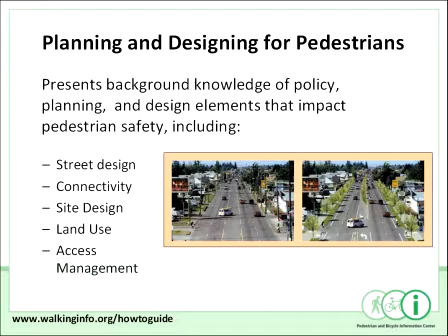Next we get into stakeholder involvement. Before we really start analyzing data, who are the people that need to be involved in helping to make this overall pedestrian safety action plan workable, to make it happen? Because we need more than just planners and engineers.

We need also educators to help educate the public. We need police for the enforcement elements. Public health officials are a critical part of the overall process, and they do a lot of training and education as well.

Engaged, involved citizens and organizations are very important at the community level in particular. Public employees, agency officials, at the state and local level need to be involved and engaged to help with the overall process. Now we're recently seeing more interest by business owners, and that they have some real important elements of this that can benefit them in some ways.

Where you have more pedestrians and bicyclists, but pedestrians in particular, walking by the business at low speeds, or being able to make it a more pedestrian-friendly environment, that's where businesses often are really improved, and we see revitalized towns and cities. And of course, the media is also an important element in getting out the safety messages and other messages that are needed there.

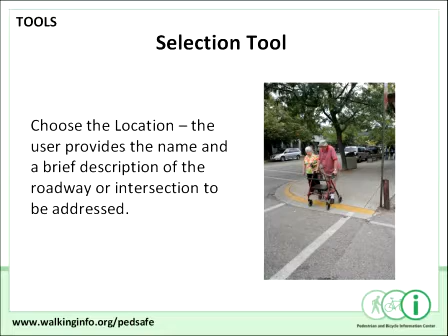This is where it asks you a series of questions. What is the type of the location? Is it urban, suburban, rural? What is the functional class? Is it intersection or mid-block? What's the traffic volume? And what's the type of traffic control that's there?

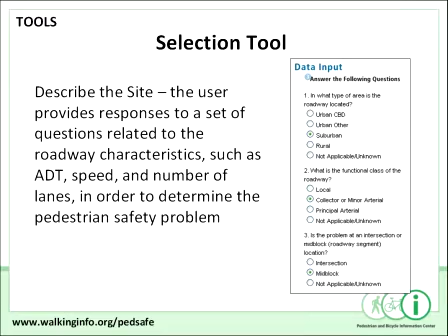It's kind of like when you go to a doctor with an ailment, a pain in your knee or something, and he asks you a series of questions because he's trying to get more information to pin down the cause of the pain. It's the same thing here: this program asks for details about the location so it can help lead to the correct countermeasure.

Okay, now the next step is also really important. It asks you, what is the performance objective? And that's just a big term for what is the problem?

You may want to reduce speeds of motor vehicle traffic, or improve the sight distance, or reduce the volume of motor vehicles going along the street, reduce exposure for pedestrians so that they're not in the street quite as long, or improve pedestrian access or mobility, encouraging walking by improved aesthetics, which can increase the amount of walking. Or what about where motorists or pedestrians are really not complying with local laws?

Are there some treatments that can benefit there? Many of those treatments could involve engineering improvements or address other kinds of behavior that can lead to crashes. So if you have in mind the kinds of behaviors or situations that you want to change, you can fill out one or more of these dots.

If, however, you have more detailed crash information, maybe several pedestrian crashes, and you can determine what type of crashes they are, you can then select one or more of the following crash types. So if it's an intersection, it may be a multiple threat crash or a turning vehicle crash. You can indicate the kinds of pedestrian crashes occurring at that site. That really helps define what the problem is.

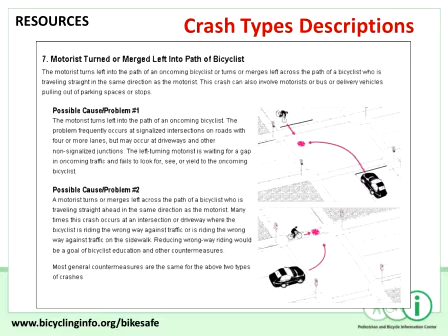So we have shared roadway, on-roadway bike facilities, intersection treatments, maintenance treatments, traffic calming treatments, trails and shared use paths, markings, signs and signals, and education and enforcement measures that all could be considered.

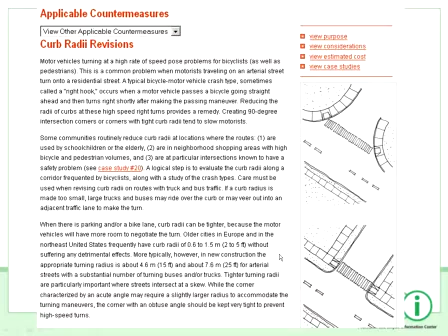Here's another countermeasure, curb radii revisions. It provides a detailed description, images, and then you can link to case studies. This is not a case study about curb radii revisions - we'll get to that next.

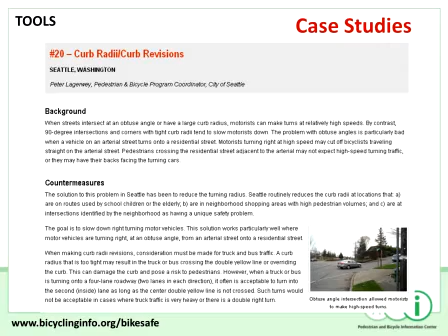But each of the case studies includes background, what the countermeasures were that were implemented, and as much evaluation as was available, recommendations from that community, cost and funding information, and also contact information. So you can learn from your colleagues around the country. Here is a case study about curb radii revisions from Seattle.

So if we want to know what types of crashes are a problem in your community and how to determine performance priorities, how do we get that information? Charlie already talked a little bit about some of these tools, like how to develop a pedestrian safety action plan. There's another tool we're not talking about today, the pedestrian and bicycle intersection safety indices, and some that Dan is going to talk about, the audit guide.

And now to learn about the crash problems, PBCAT can help us with that. The purpose of PBCAT is that it helps develop a detailed crash database that can help us understand what's going on in crashes between bicyclists or pedestrians and motor vehicles. And that's a first start in understanding crash problems and helping address some safety needs.

Typically, state crash databases have information on when, where, who was involved, like the age and so forth of the pedestrians and motorists involved. But when a bicycle or pedestrian was involved, oftentimes that's all it tells us about what happened. It doesn't give us a more detailed accident type. Not all databases are the same, but that's the typical scenario.

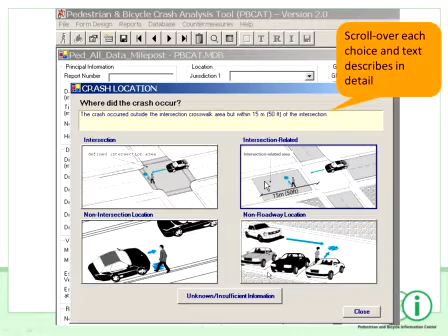So this is what a crash typing screen looks like, and it's pretty user-friendly. There are images which illustrate example scenarios, and the first screen is to choose a general description of where the crash occurred. When you scroll over these windows, it pops up the precise definition of what is meant by that particular image, giving the detail of how to make your decision. Then when you click on one of the screens, it moves to your next window.

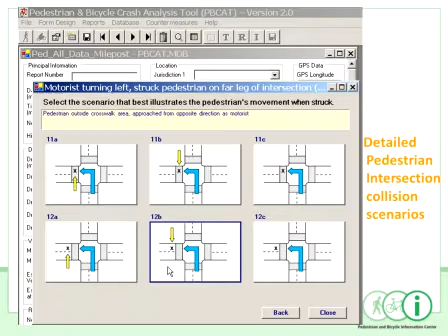Other data elements that are captured, in addition to the general location type from the first screen, include whether it was an intersection or non-intersection crash, or whether it actually occurred off the roadway, such as in a parking lot or other off-roadway area. When typing bicycle crashes, you can capture data on where the bicyclist was just before the crash occurred, where they were riding before any maneuvers that led to the crash, and whether the bicyclist was traveling in the direction of traffic or facing traffic, or whether that was not applicable.

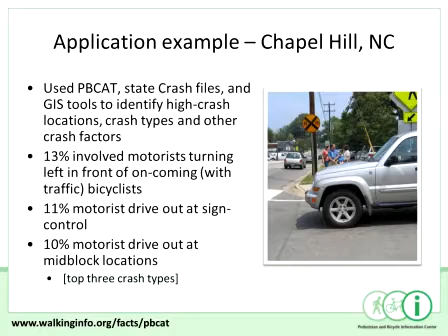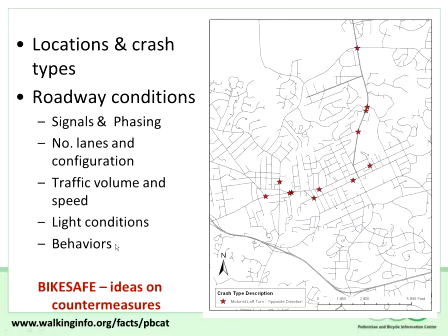Once we knew some of the high crash areas and the types of crashes, we went out and did roadway safety audits at some of these locations and identified conditions which we need to know if we're going to choose appropriate countermeasures. We can look at signals and phasing, the number of lanes, light conditions, as well as behaviors—I'm sure Dan will talk about that more.

All of this information helped us narrow down to the more optimal countermeasures, and we can make recommendations for local agencies to consider. As Charlie mentioned, these aren't final lists from BIKESAFE or from such analyses—they still must undergo detailed engineering analysis and review. But it helps narrow down the types of countermeasures that might be appropriate for the situations and behaviors you're seeing.

We had already identified, from the crash typing, that wrong-way cycling was a frequent occurrence, along with cycling on the sidewalk. But one thing we couldn't tell from the crash data—and that's why it's important to combine multiple sources of data—is that there are lots of driveways with sight distance issues, which could enhance the risk of motorist pull-out crashes because they can't see bicyclists riding the wrong way on the sidewalk very well. There are also wide turn radii and big wide intersections with high speeds at some locations.

So again, it's important to analyze the crash data—it helps you understand the problems, but it's also important to go out and look on the ground to see what's going on. Now I'm going to turn it over to Dan to talk about the next steps. Thank you.

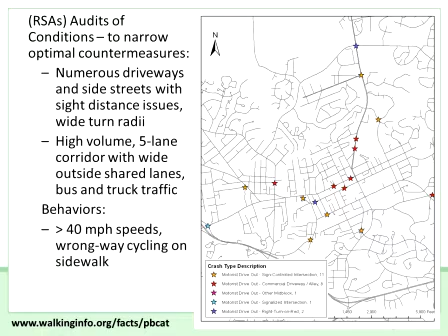Okay, thanks, Libby. All right, let me set this up here.

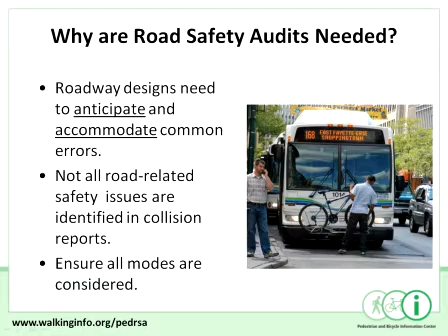The other thing you have to consider when conducting an RSA is that not all road safety issues are identified in collision reports, and that's especially true with pedestrian-type collisions. There have been various studies showing that maybe about 50% of pedestrian crashes go unreported through state reporting agencies. And again, to ensure that all modes are considered, you can see in the photo there, you have bicyclists, transit, and pedestrians all interacting together.

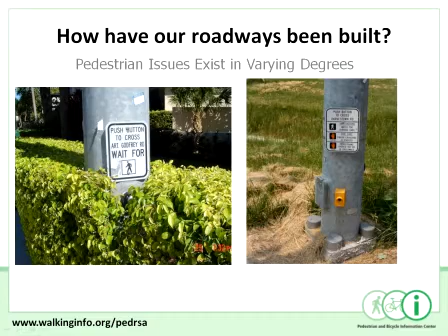So some of the issues with the way roads have been built are shown here. You'll see in the photograph on the left a push button that's being covered by bushes. That's kind of a temporary issue and can be fixed fairly easily, but still presents an obstacle to pedestrians. The picture on the right shows a push button that's actually below knee height for a human being - it looks like a pet crossing or something. But again, that's a more permanent issue in that it makes that push button inaccessible.

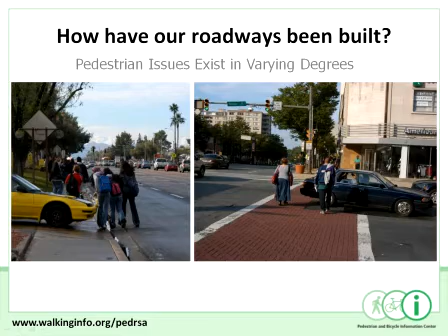Then you start to have even more serious issues in terms of pedestrians walking on the roadway and conflicting with traffic coming out of access points - that's the photo on the left. The photo on the right shows probably an even more serious problem, a difficult situation where there's conflicting turning movement traffic with a pedestrian crossing. Pedestrians do have the walk signal, but that vehicle turned left in front of them to beat the oncoming traffic. So there are different degrees of pedestrian issues, and conducting the RSA helps you prioritize those issues.

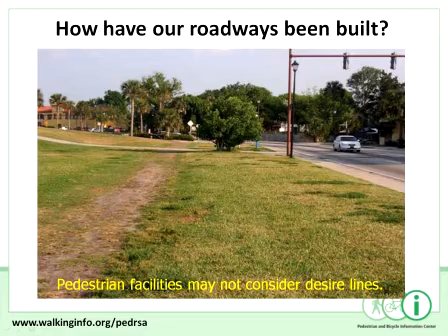Just a few other quick examples of considerations when conducting an RSA: pedestrian desire lines. In this photo, you see a parallel path to the sidewalk about 10 or 12 feet away, which is really where pedestrians prefer to walk - they prefer a buffer space between traffic and walking along the roadway. That's a similar trend you see when pedestrians are crossing the roadway. You see pedestrians crossing outside of the crosswalk here because they're following that straight desire line created by walking along the sidewalk - they're not going out of their way to walk in that crosswalk. So considering pedestrian desire lines and how pedestrians actually use facilities is critical to conducting an RSA.

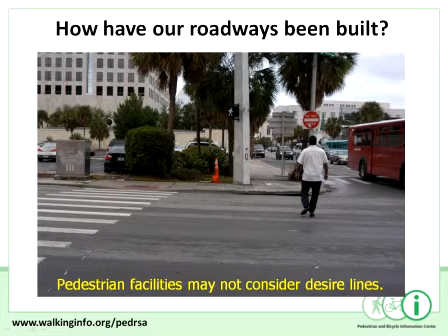So in the guide, it provides several pieces of information. The first section is what's referred to as the knowledge base, which basically provides the basic information you need to have about pedestrians before going into an RSA or conducting an RSA where pedestrians are present.

It also talks about characteristics of pedestrians that you need to consider, like walking speeds and spatial needs, what potential impairments pedestrians might have, and how that might affect pedestrian safety.

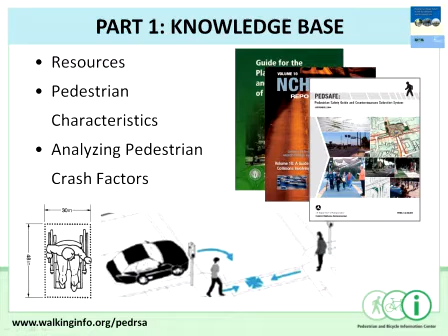The third bullet is analyzing pedestrian crash factors, and you can see it talks about tools like PBCAT, which Libby described, and also other considerations in interpreting data with pedestrians. I described briefly the fact that you might not see all pedestrian crashes reported.

The second part of the guide talks about what it provides are prompts. These prompts are there to help remind a user to look into a particular safety issue or investigate to see if a condition is a safety issue. There are 4 different categories that those prompts are separated into.

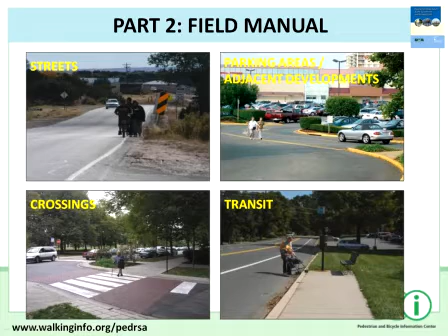And this is really highlighted in the guide in terms of what the considerations are when going through this process. You need to look specifically at what issues there could be with pedestrians.

So some other components I had started to mention are the prompt lists. The prompt lists are basically what the RSA team can use to help remind them of all the issues that could potentially be there for pedestrians, ensuring they're really investigating those potential issues thoroughly.

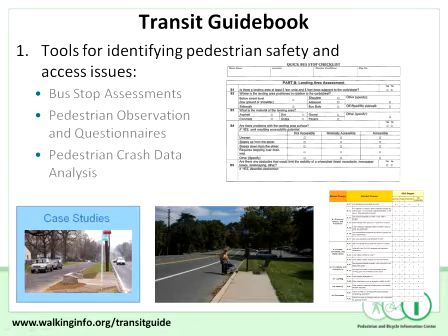The lower left-hand corner shows case studies, and I want to get into that a bit. A lot of the case studies in the guide show how different agencies have been successful. This one shows a program in Montgomery County, Maryland, where they did an assessment of all their bus stops in the county and prioritized which stops needed to be addressed to make them safer. Through that program, the county was able to address many of them and are still in the process of addressing issues at other bus stops.

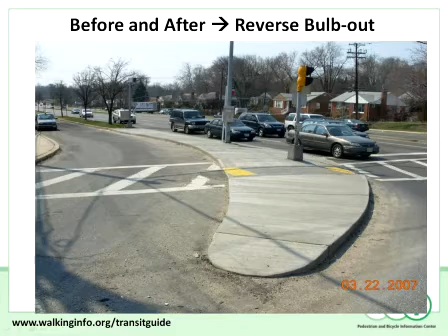Here you see there's now an accessible path to the bus stop, and as a result of their study, they were able to create that accessible path. So again, the case studies are a big part of what's provided in the guidebook.

What they were able to do is provide an accessible walkway, an accessible pad, and a little knee wall too, which helps provide seating. It's also got a kind of rock texture, so it's graffiti proof, and it's also easily maintained.

The next section is policy and organizational approaches that agencies can undertake to improve pedestrian safety. Taking internal action discusses organizational methods such as establishing a pedestrian or bus stop coordinator position within an agency, and possibly providing periodic training on pedestrian safety to staff and operators. So those are a few things.

Updating policies such as inventory—what is the policy for inventorying what facilities a transit agency has, and ensuring that's coordinated with the local transportation agency. Also, changing bus routes and stop locations to reduce walking distance or facilitate better transfers, just to reduce the exposure of pedestrians.

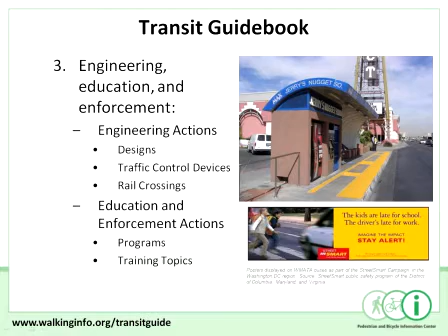Education and enforcement is obviously an important component because it's important to inform users of their responsibilities and the potential hazards or consequences of certain actions. So there's a lot of information provided for education and also for enforcement.

So in the next couple minutes, let me go quickly through the Residents Guide. You can see the purpose here: basically it's used by residents to help provide a safer community, and the audience is, of course, people participating at that community level. Some of the main overview is shown on this slide.

There are three basic points of this guide: one is to educate the public, inform them of different methods to help address safety, and then to promote a safe walking environment.

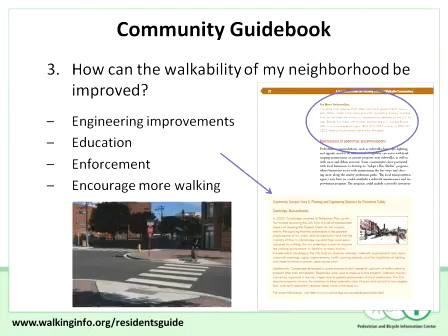This next section is 'For more information,' which just provides terminology so they can talk with different people to describe issues. Again, links and references to national organizations or other areas where they can find help, and frequently asked questions. The final section is the resource materials.

So again, those are linked, or referenced, throughout the document so that they're easily accessible by the user. And the final thing I want to say about this is that this is actually undergoing...

It's part of a demonstration project that is supported by NHTSA and APBP, where it's being deployed in over a dozen communities, and they're using the guide to really assess if it's helped them in understanding their pedestrian safety issues and helping them address those issues.

And they're evaluating the guide, and one of the plans that comes out of this is potentially an update of the guide based on feedback from these dozen or so communities that have kind of pilot tested the guide. So that was a quick rundown of the things I wanted to describe for those 3 guides.